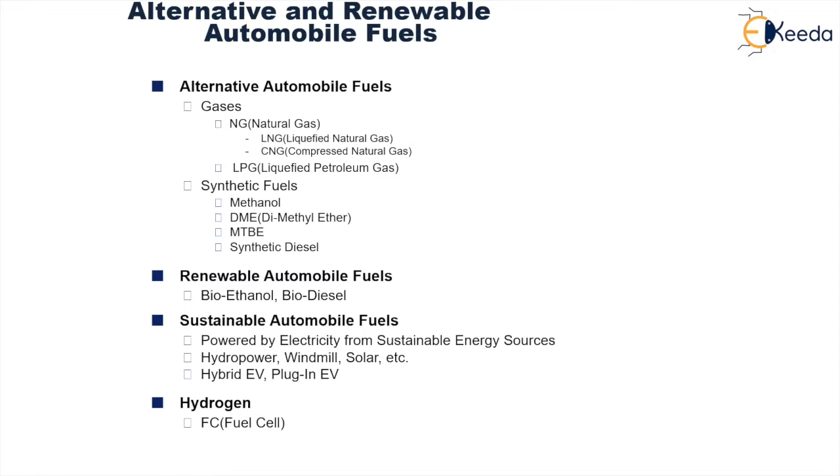If we consider the alternative fuels, they are chiefly derived from two broad sources: fossil energy source and renewable energy source. From fossil energy source, we have three main categories, that is crude, natural gas, and coal. Crude, after refining, gives you LPG, and after blending, it will give you MOGAS and diesel. Natural gas will give you LNG, PNG, and CNG. If it is subjected to synthesis, it can give you synthetic fuels and methyl alcohol.

Further, coal, when subjected to gasification and synthesis, will again give you synthetic fuels and methyl alcohol. Wood, when subjected to gasification and synthesis, again gives you synthetic fuels and methyl alcohol, and if subjected to fermentation, it will give you ethyl alcohol. The same is the case with grain: when subjected to fermentation, it gives ethyl alcohol. Vegetable oil, when esterification is done on it, gives you biodiesel.

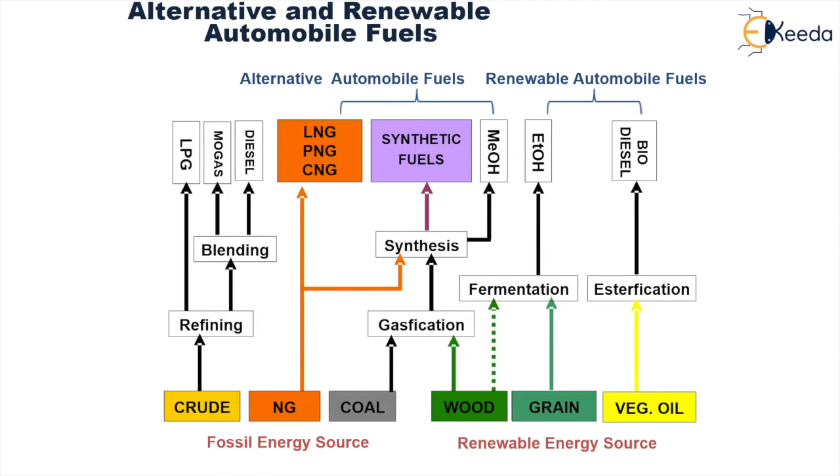Now, alternative automobile fuels are gases, that is LNG, PNG, CNG, synthetic fuels, and methyl alcohol. Renewable automobile fuels are ethyl alcohol and biodiesel. For alternative automobile fuels like natural gas, it is derived from the natural gas field via PNG and LNG.

This LNG is cooled to below minus 127 degrees Celsius and converted into liquid, thereby reducing its volume by around 600 times. Shown here is the supply chain of LNG from the gas reserves to the exporter, shipped through the containers and then directly to the importer.

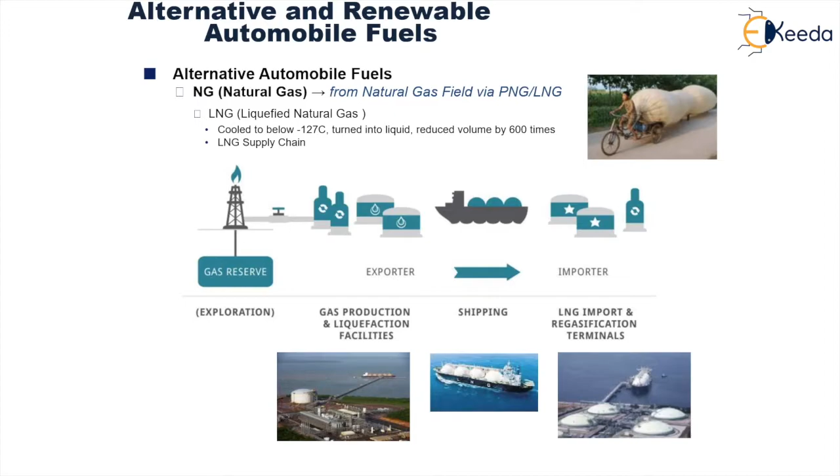Then we have natural gas. In natural gas, we have CNG, that is compressed natural gas, which is compressed to 3000 psi, or say 20,000 kilopascal, such that it gets reduced to 1% of original volume. Further, energy equivalent to 1 liter of gasoline is obtained from CNG to the tune of 0.9 meter cube. Octane number in case of CNG is in the range of 130.

On the other hand, as a drawback, it reduces 10 to 20% of the total power output that is obtained from conventional gasoline in an IC engine. In order to reduce the quantity of pollutants, CNG is preferably used in many countries in public sector transportation.

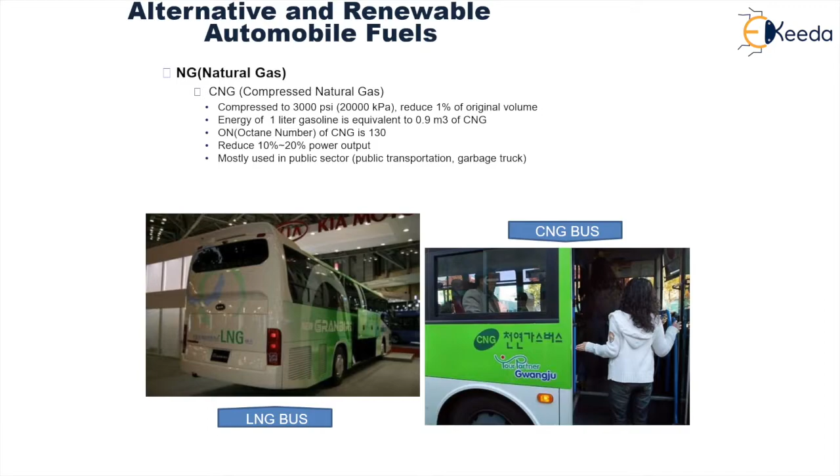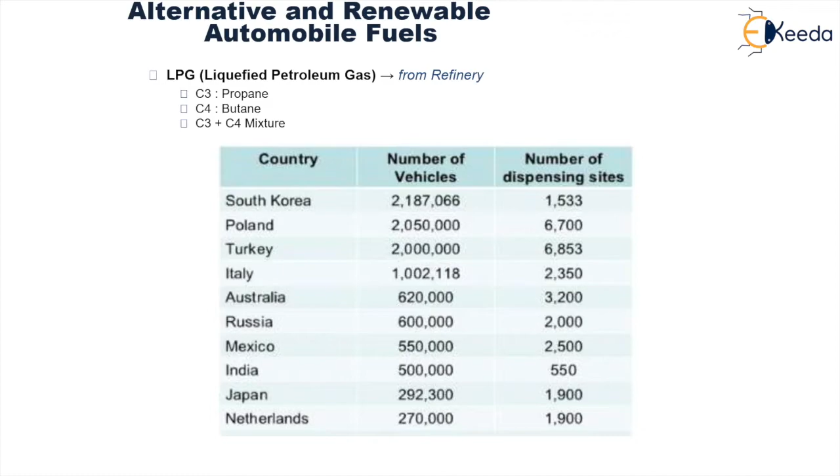Then we have LPG, liquefied petroleum gas, which is obtained from the refinery. There are three categories here: C3, C4, and C3 plus C4. C3 is propane, C4 is butane, and C3 plus C4 is a mixture of the two. As far as the country-wise distribution of number of vehicles and dispensing sites is concerned, this table indicates how many vehicles currently run on LPG and what facilities are available for refueling these vehicles with LPG.

This is a broad layout in which an LPG cylinder is retrofitted in a conventional gasoline driven car. This is basically a bi-fuel car. You will see that underfloor gas tank mounting is done here for LPG alongside the petrol tank. Both these fuels are supplied through fuel lines to the conventional engine. Then in the dashboard you have a switch with which you can switch the fuel supply depending upon the condition of the IC engine when it is running.

You need to mount gas injectors on the engine, and you also need a pressure regulator. The major disadvantage with LPG is that at the time of starting and cold running conditions, LPG cannot be used directly. First, you have to start running your engine on gasoline, and then when required running temperatures are attained, you can switch to LPG.

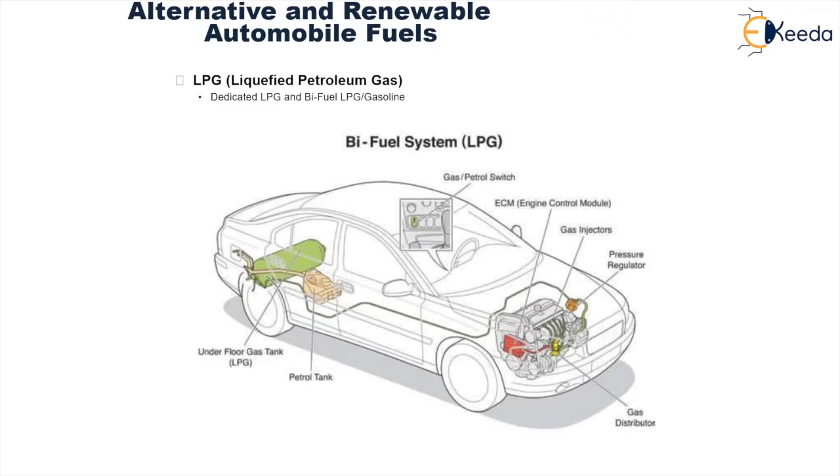Then we have over here synthetic fuels. Synthetic diesel is found to be free of sulfur, and it also exhibits a higher cetane number. However, low temperature fluidity is considered to be a drawback. It is basically obtained from coal and biomass and also natural gas.

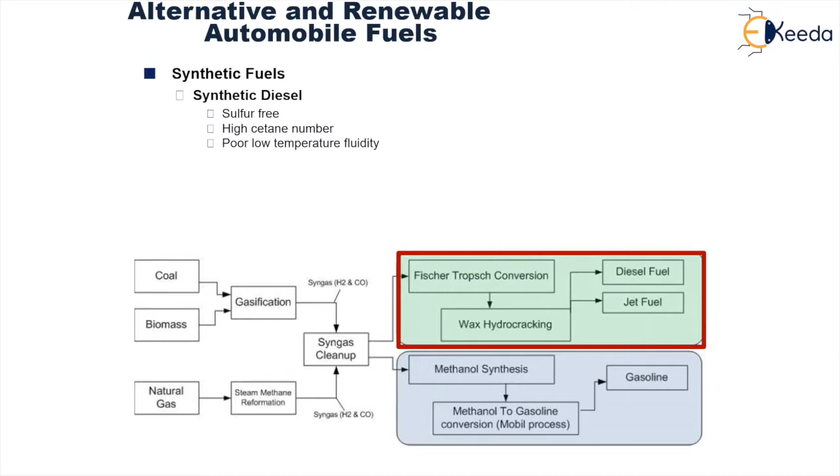When coal and biomass are subjected to gasification and syngas cleanup, then through Fischer-Tropsch conversion and wax hydrocracking, we get diesel fuel and jet fuel. However, when we use natural gas and subject it to steam methane reformation and syngas cleanup, we get methanol synthesis, and methanol then undergoes gasoline conversion, and finally you get gasoline.

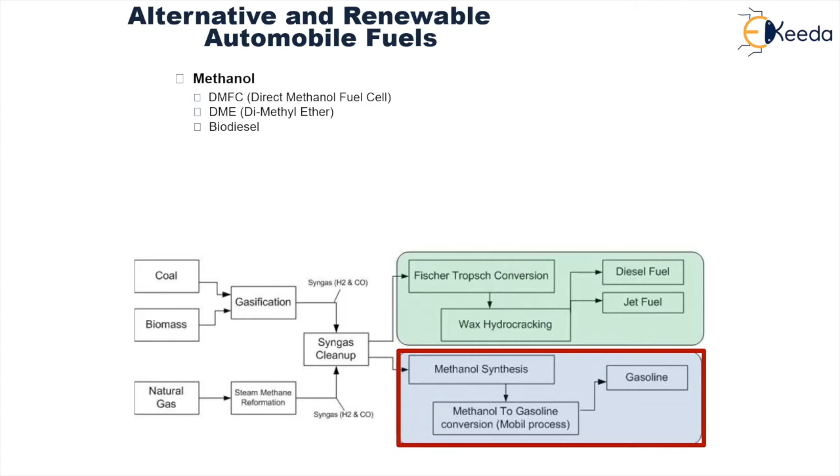Methanol is in different forms, that is DMFC, direct methanol fuel cell, dimethyl ether, and finally biodiesel. Dimethyl ether is an environmentally compatible propellant for spray. If we consider its physical properties, it is similar to LPG, however, exhibiting a high cetane number, that is CN.

It exhibits a greater potential to substitute diesel being used in automobile engines and also LPG. Further on, with minor changes, the existing LPG supply chain can be used for dimethyl ether as well. However, production economy needs to be improved.

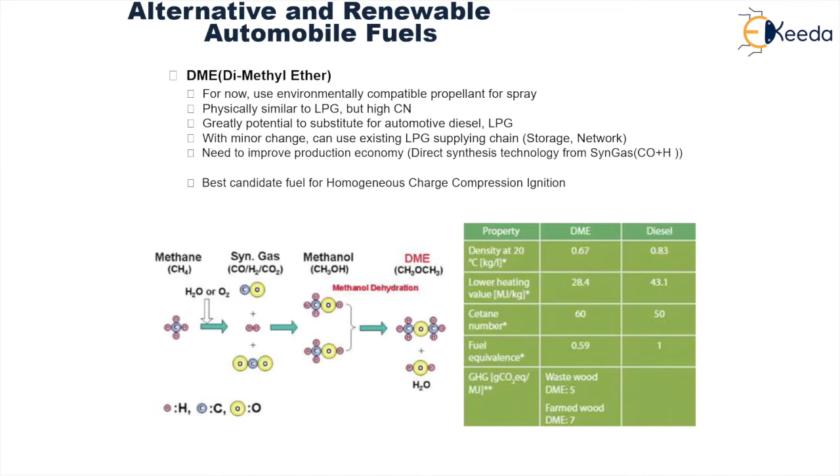And volume equivalent: for every 1 gallon of gasoline you will need 1.15 gallon of propane, 122 cubic feet of CNG, 1.8 gallon of methanol, and 1.5 gallon of ethanol. Then the type in which the fuel is stored: all the fuels are stored in the form of liquid with the exception of CNG, which is stored in the form of gas. In miles per gallon as compared to gasoline, the least is over here methanol.

The tank size also is the least for gasoline, whereas all the other fuels require a larger tank size. As far as the pressure is concerned, CNG requires a high range of pressure. Then cold weather running condition is good for CNG, propane and gasoline. However, for methanol and ethanol, the cold running conditions are very poor.

Also, when fuels other than gasoline are used, we find that there is a power loss in the range of 5 to 20%. The maximum power loss is there when we use CNG. As far as toxicity is concerned, only propane and CNG are non-toxic. Gasoline, methanol, and ethanol are toxic, whereas methanol is considered to be a very highly toxic fuel.

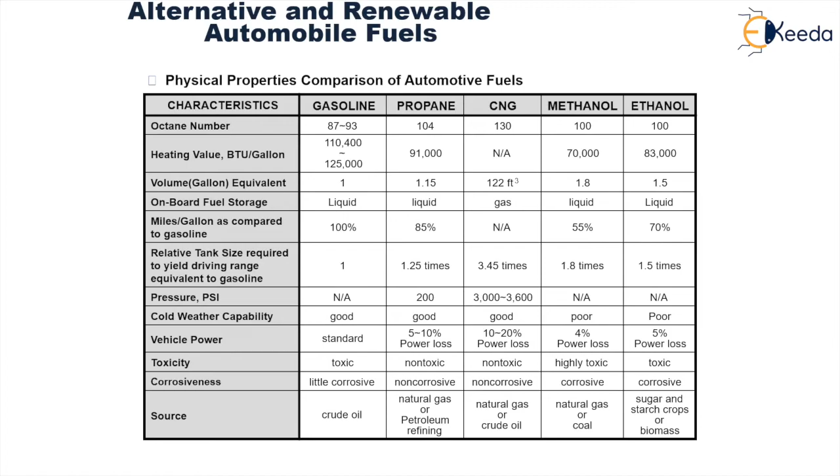Then we have fuel cells. In this fuel cell, the chief element that is used is hydrogen. As in the case of LPG, hydrogen cylinders are mounted below the floor body of the vehicle. This hydrogen is supplied to a fuel cell stack which generates electricity, and on this electricity, the vehicle is run using a motor.

Inside each fuel cell, hydrogen from the tanks is passed through a negative electrode. In this negative electrode, a catalyst is present. Because of this catalyst, electrons are separated from the hydrogen atoms. These electrons now flow from the negative to the positive electrode, as a result of which electricity is generated. Also, hydrogen ions migrate towards the positive electrode through an electrolytic membrane, where they combine with oxygen obtained from air to form water.

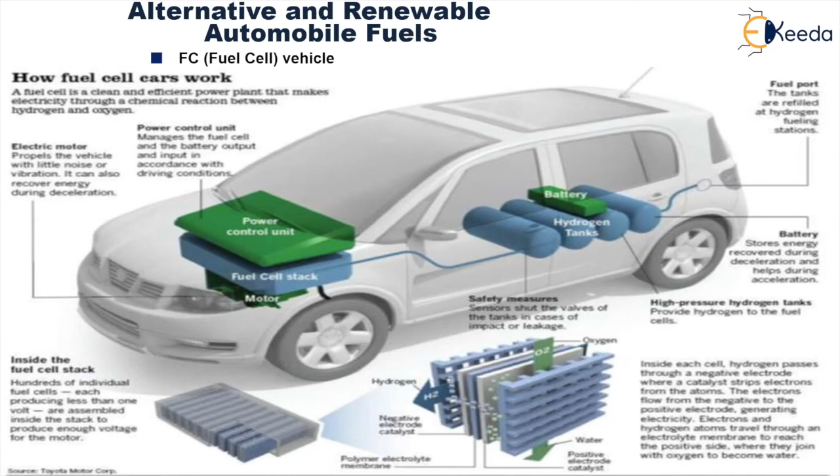This is an example of a fuel cell. As we can see over here, hydrogen is given in the form of fuel. At the negative electrode, electrons are drawn out, and hydrogen ions pass through an electrolytic solution. Electrons, when they flow from negative to positive electrode, generate electricity, and hydrogen ions pass through the electrolytic solution to the positive electrode, where they combine with oxygen obtained from air and form water.

So this was something about the different types of alternative fuels that are used.